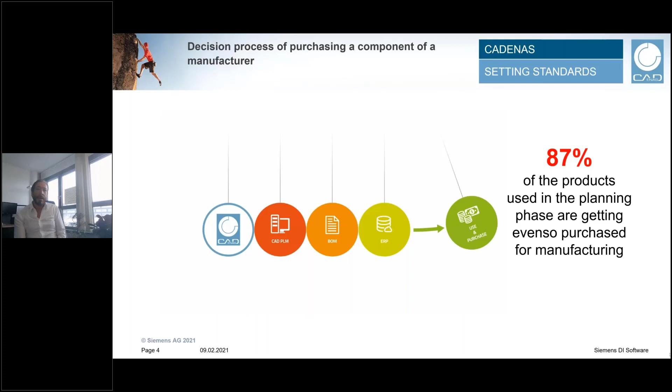So to understand how I can make the engineer happy, we go on to the next slide, and we will see the evolution of CAD data over the last decades. In the 90s, you just made an engineer happy by delivering him a 2D DXF or DWG format. Sometimes you could also make him happy by delivering a PDF. So that was in the 90s.

If you go to the early millennium, engineering already started to be 3D. There you had to deliver a neutral format called STEP or IGES. But also in the first decade of the millennium, it moved. So every engineer is requesting today 3D native formats based in NX or Solid Edge or SolidWorks or Creo.

But if you're looking to the 2020s, you see that with 3D native you make him a little bit happy, but today you need a 4D model. A 4D model is a 3D native model plus behavior plus additional information. What we understand by a 4D model, I can show you on the next slide with a small video.

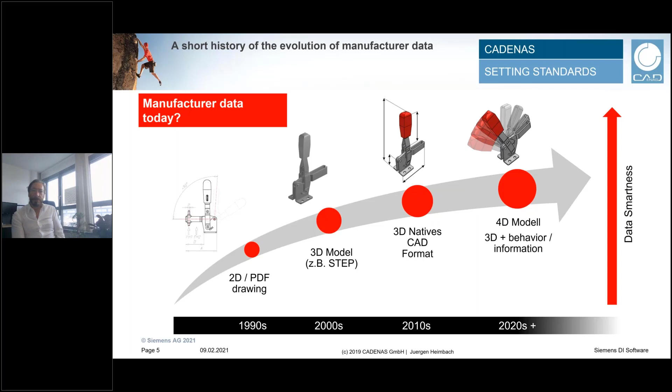Jürgen, here's the first question, I guess, from an electrical manufacturer. His question is, with his electrical components, there is no behavior. So what should he do? I think we will see it also on the next slide in the video. Of course, electrical components also have behavior.

But a normal 3D model of an electronic or electrotechnical component cannot control a mechanical component. What they need, of course, is the behavior, like a PLC, and they have to give information to the mechanical components. For example, with a sensor, if you want to grip anything, the sensor has to tell the gripper that the part is now at the right location and now you have to grip the part. That is done by electronic components.

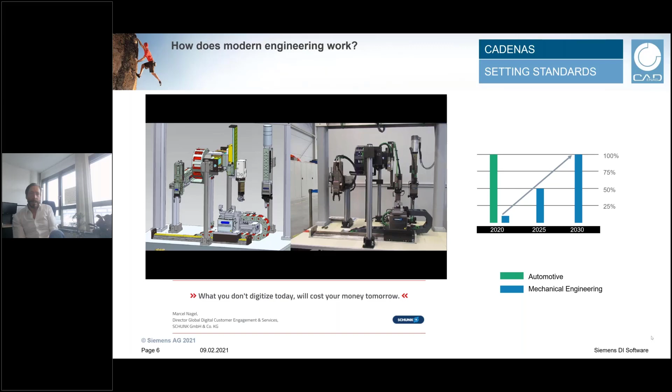For this, of course, we have the experts from Siemens on board, and Bernd will show you on the next slide how Siemens, together with Cadenas, is solving these requirements of the engineering of the future. Yes, exactly. Bernd, I think you mentioned that perfectly. Thanks, Wolfgang, for switching over.

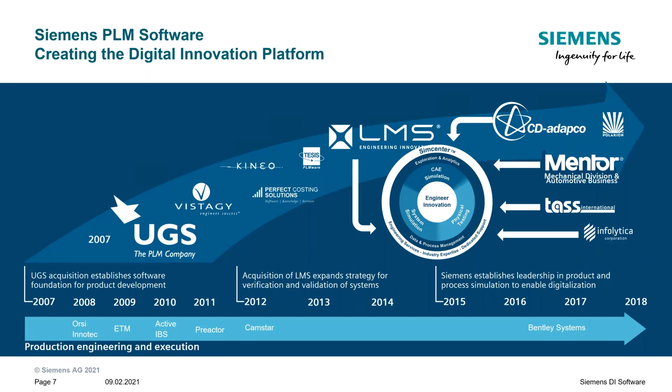That's great already. Let's first start with a short introduction of who Siemens Digital Industries Software is. Our story starts basically in 2007 when Siemens acquired UGS. Stepwise, Siemens increased their software business by purchasing Vistagy, acquiring Kineo and so on. Stepwise, functionalities came into our system, and we developed over the last decade with a lot of different companies.

One special portfolio we acquired is Mentor, and with this portfolio we got the possibility to do electrical design, harnessing, and connections. Starting from the basic CAD systems, we developed into a company which can offer a lot more than just CAD: simulation, FEM simulations, electrical engineering tools, and so on. Good.

Please switch over to the next one, Wolfgang.

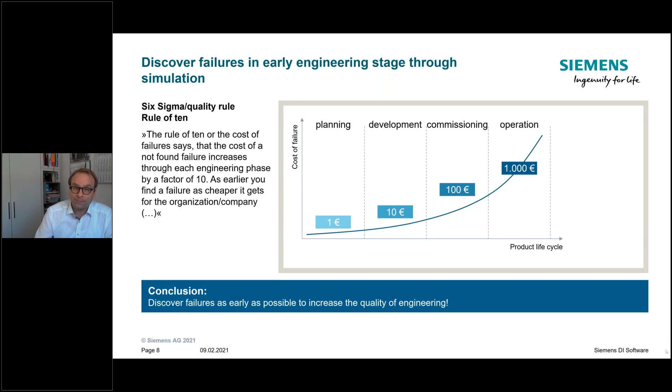Good. Please switch over to the next one, Wolfgang.

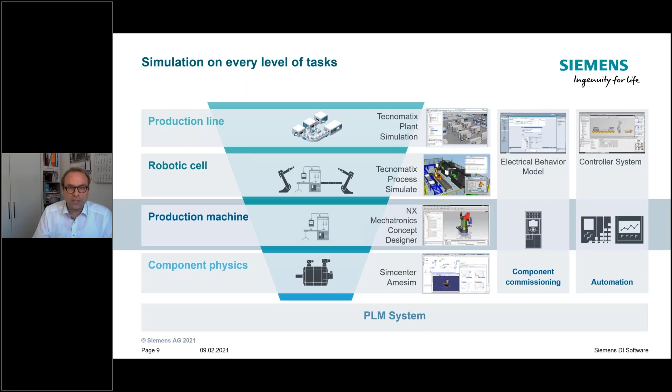Good. Thank you, Bernd. You have to add something, Bernd? No, that's fine. I just wanted to start over with the next slide. So I'm right excited to present, as you know. Oh, my time is over now, and Victor starts over, right?

Yes, that's true. Thank you, Bernd, for introducing the different levels of simulation, as well as, of course, talking about the behavior models. And it's great to hear some real examples, going a little bit deeper into details. Thanks for that, Victor. Exactly. So this will be my task, showing you a couple of examples and maybe some deeper insight into this mechatronic design approach that we are following.

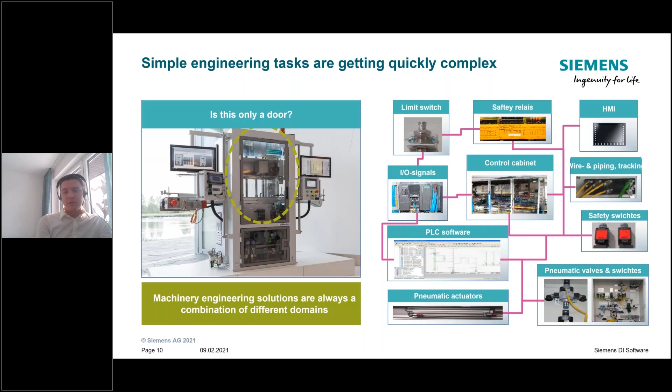And if we take that into consideration, we detect that in the early phases when we design a machine, we need to involve mechanical, electrical, automation departments, maybe even fluidic departments if we have some pneumatic or hydraulic applications as well. So the tasks are getting quite complex and interconnected, as we would call it. And if we look at the data, going into the next slide, please, we can see that we have very much information that is spread throughout these processes.

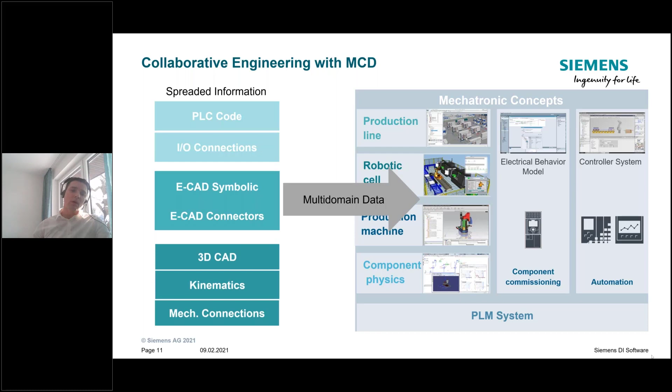So as we saw earlier, we have these different levels of simulation, for example, production lines or production machine level, or even the level of a component in detail in the component physics. We also have electrical behavior that's relevant for us. We have the control system, etc., and everything needs to be somehow interconnected and provided by component suppliers as well nowadays. So let's take an example of the data that can be provided through the systems. Going to the next slide, here we took a deeper look into the kinematic definition of an object.

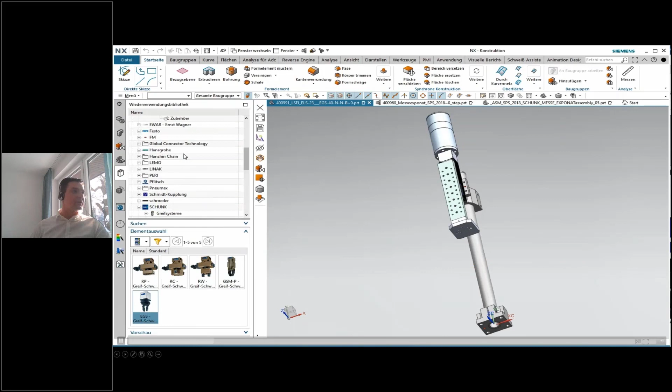So in this video, let's see if it plays. I hope it plays for you guys. For me, it's a little bit not as fluid, I would say, but I have it as a backup here as well. I hope in the recording it's responding a bit better.

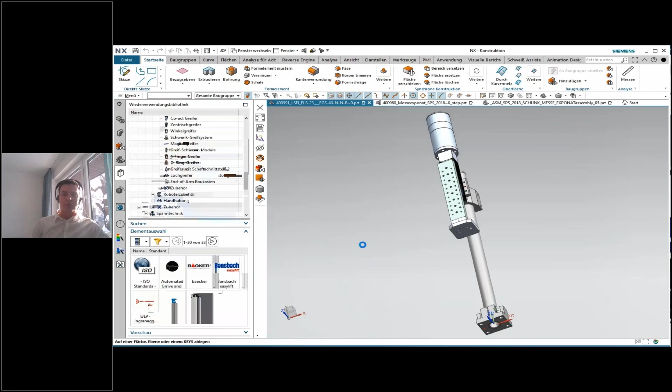So here, for example, our task is to have a gripper installed into our machine. And as we can see here, we are in the NX design environment, and we can browse through the Cadenas library in this case, and of course select our gripper. In this case, it's a simple Schunk gripper. And here we place the object directly in this dialog. We can, of course, define the parameters and configure our component, similar to how I would do it in Cadenas PARTsolutions, for example. But here it's completely integrated in NX.

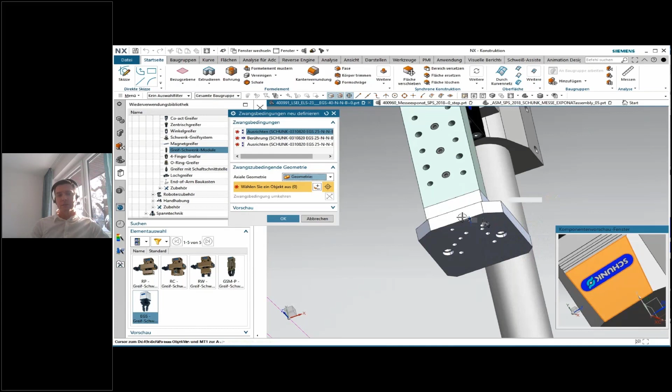I can use the default NX functionality here to place my component on the right position. So have some assembly constraints defined directly for this component. This is, I would say, some default functionality that there is.

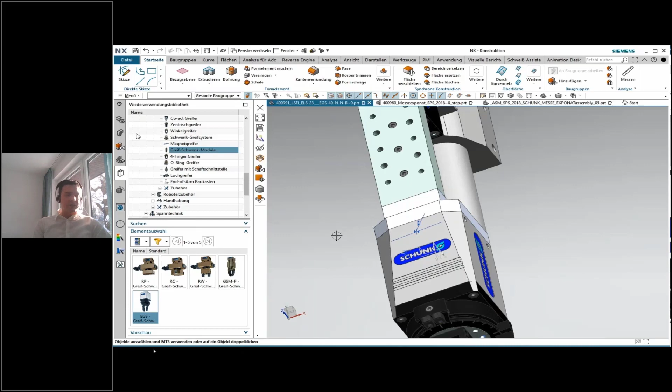But the interesting part about this component that we just added is it's actually multiphysics. So it includes some kind of behavior in addition to its 3D representation. So in this case, when we switch to Mechatronics Concept Designer, we will see that we have the physics already defined. So the gripper in this case has the functionality that it has 2 axes that grip the components. And this is something that is provided directly in the component via Cadenas.

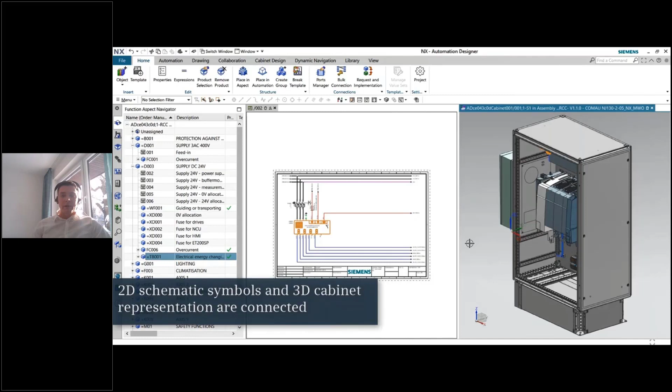Going to the next video, this is another example from the multidiscipline of engineering. So here the task is to define the electrical and cabinet design for a component or for a machine. And here we are also in NX, but in this scenario, we are in the automation and electrical design department. And here the task is to add components to the electrical cabinet as well as to the electrical schematics.

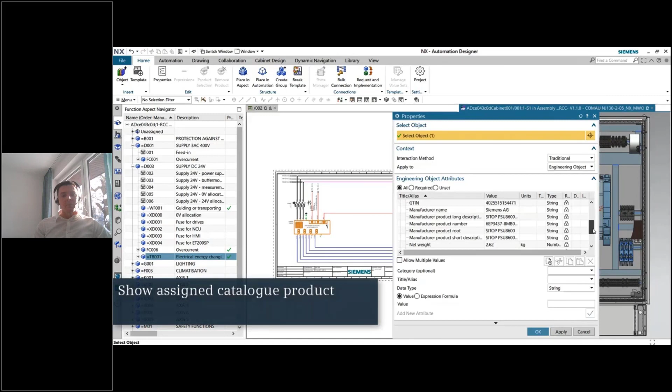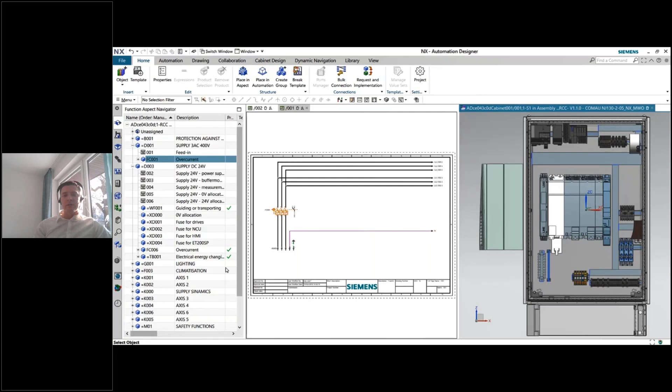And on the left side, we see the function aspect navigator. This is more like the electrical structure of the machine. And we can switch to the feed-in area here. And we can see, okay, here we need a new component. We might already have a schematics for the component, but we are not having the specific component selected yet. This is a common workflow for electrical design, to have a placeholder at the beginning and then specify the component further in a later stage.

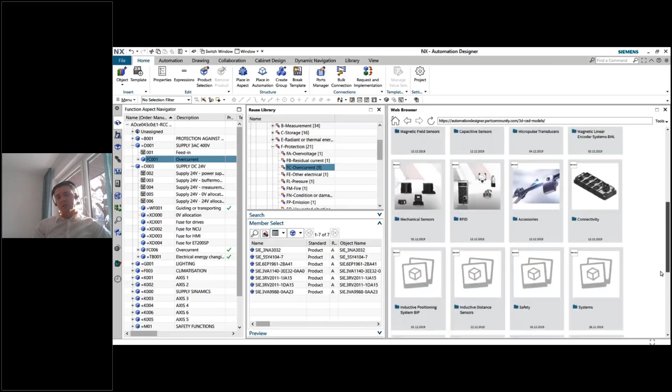And here we can also use the web browser, for example, and directly browse to the PARTcommunity. In this case, we are more interested in the combination of 3D data as well as the electrical design data, because we want to have electrical information added to the components as well. In this case, we need a circuit breaker and some solution for overcurrent.

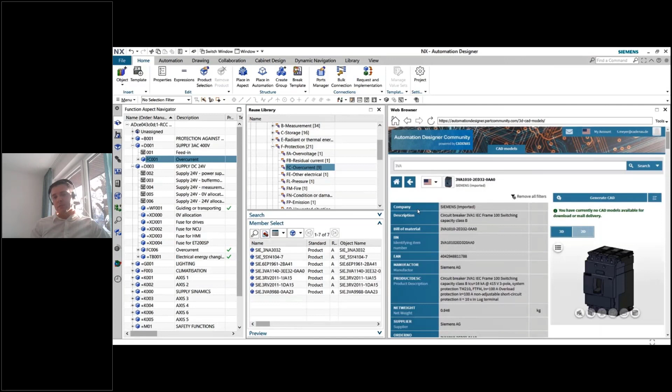So we go to the Siemens area and select a power connector. Here we see directly, of course, the 3D preview, as we are already using in 3D CAD design. But here we are more focused in this task on the combination of CAD and electrical design. So we select a component that fits our electrical needs. As you can see here, of course, we have our parameterization for the component, and also the electrical parameters.

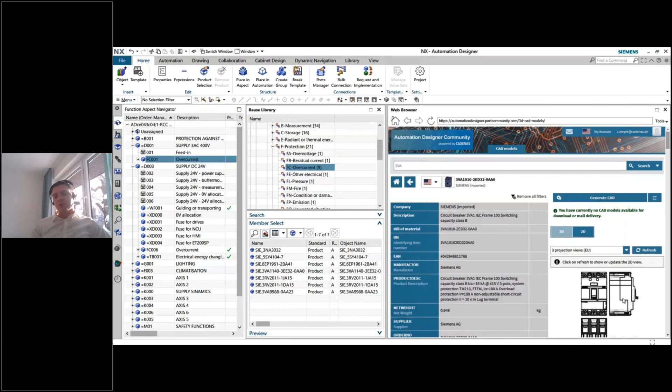I can see I have the 3D design on the right side. Switching to the 2D design, we have, of course, the layout of the components as well. But the important part here is when we generate this component in the next clicks, we actually generate not only the mechanical representation of it, but also the electrical. And for the electrical representation, we need classifications, for example, via eCl@ss, and this is provided with a component.

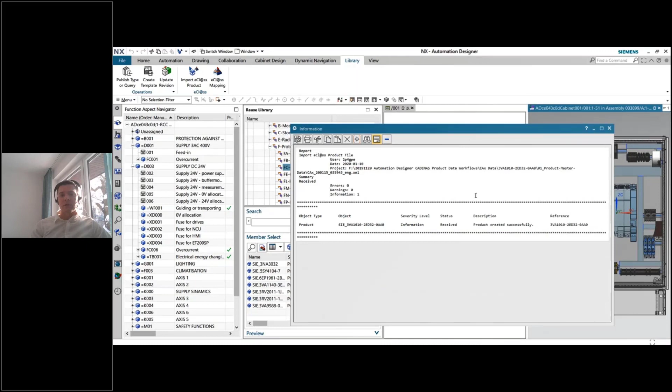So here I can add this component to my customer library that I'm using currently, and it's automatically specified and classified via electrical parameterization. So here on the NX reuse library, I can just refresh my part, and we can see, okay, the component is added. And this is the electrical and mechanical representation. This is the most important part here.

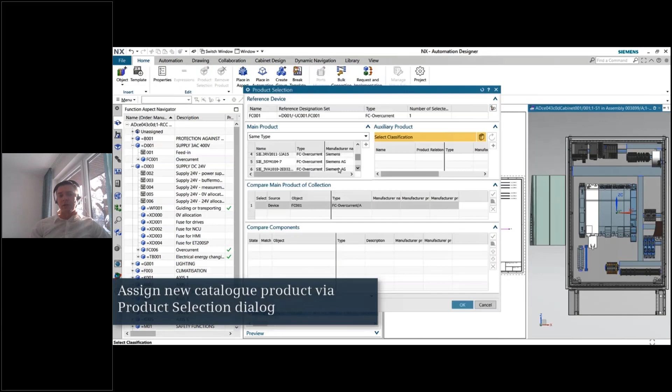So for my electrical structure, I can now select this component here, add it to my electrical design, and here I just can drag and drop the component to my electrical design as well as to my schematic design, and place it, of course, in my cabinet in this case.

So these two small examples we wanted to show you. The first one was the 3D data included with the mechanical, kinematic information, as well as the behavior from the gripper, for example. And the second example was the 3D data included with the electrical design, which is, of course, also included in the multi-domain data that we want to provide to our customers.

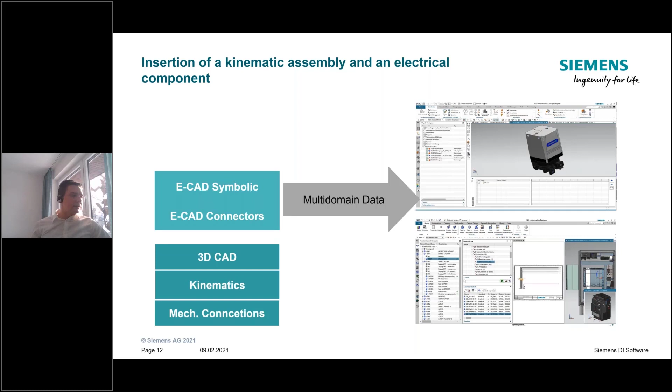Going to the next slide, we can see it in a different view. So we have, of course, our different libraries, and the important part is that we need this multi-domain data here. So depending on what level you are working on, you might need some information about the component that includes, for example, simulation data for virtual commissioning, or electrical data for cabinet design or schematics design, but also, of course, 3D data, maybe even the kinematics just for internal simulation of the timings of the machines, etc.

So this is something we want to provide, and we are working with Cadenas together to have different integrations and, of course, different possibilities for our customers to work with these multi-domain tools.

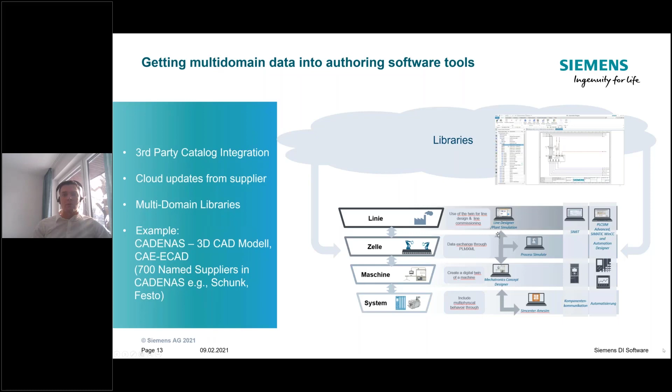So, and as a small example for Siemens components, if you go to the next slide, Bernd, did you want to talk about the different Siemens components that we offer here? I can do. Thank you for that, Victor.

And I really like these nice examples you brought over because it really shows that our NX platform is not only a CAD platform anymore, it's really a platform for mechatronic engineering, so that I can do the mechanical design, I can do mechatronic engineering by placing the kinematics for sensors and actors, and I can even do the electrical engineering. So basically all I need for mechanical engineers or for machine builders, I would say. Yeah, and even mechanical and electrical engineers so far.

Good. One point on the libraries we have together with CADENAS. Right now there are roughly 50,000 Siemens products already in this library and accessible for our customers. You can download them through PARTcommunity, or you can get your CADENAS app and download them there. And great, Wolfgang, that you switch over to the library here, so we can have a short glance. Maybe you can talk a little bit on that, Wolfgang.

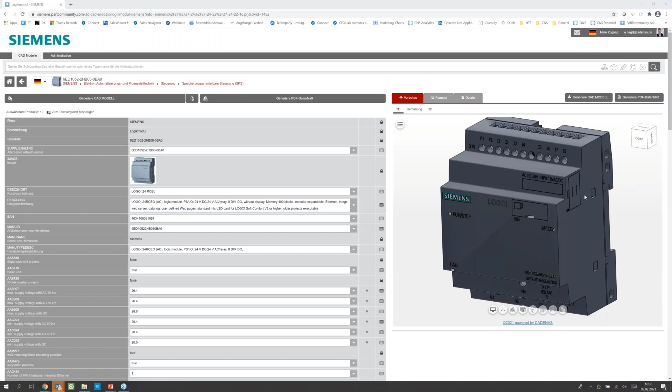Yeah, no problem. This is the public PARTcommunity catalog of Siemens, and we are now on a single product here. But as you can see, at the highest level, you will have very different... We'll switch here to English. So you also see the catalog is available in multiple languages, and you can click through this digital catalog and find the component you are looking for. You can of course also search by order number or by the name of the product. Then you can find your part.

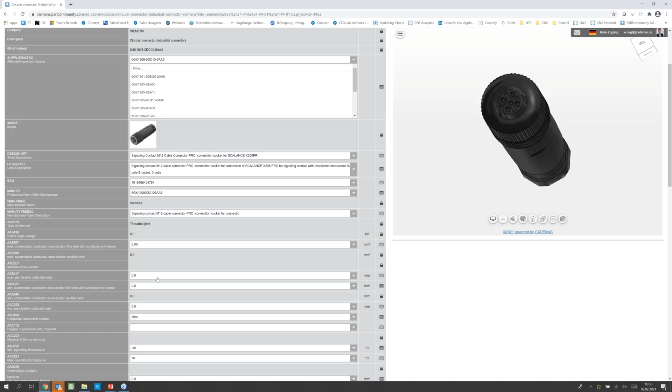You have an overview of all the attributes. You have different kinds of filters here, so you can filter by names, by attributes. For example, if you're looking for a certain diameter or certain other data. So you can really find the right product, and then you can download it in the format you are looking for, not only a CAD format; now you really need a format with all the metadata also.

Right. This catalog is freely accessible as far as I know. Is that right? Yeah, it's freely available for the users. So the users are in the best position here. They get the best planning data for €0.

That's great to hear. So sorry, this question has been pre-discussed, Wolfgang. So sorry for just asking this one.

Good. In general, I would say there are over 700 manufacturers already in your catalog. Is that right, Wolfgang? Yeah, correct. Growing and growing. Of course, we have to be honest, there is a big imbalance. Many of those catalogs are not sufficient at the moment. We have seen that there are new requirements, and many of them have to get better to really fit these new requirements. But in general, we have over 700 manufacturer catalogs.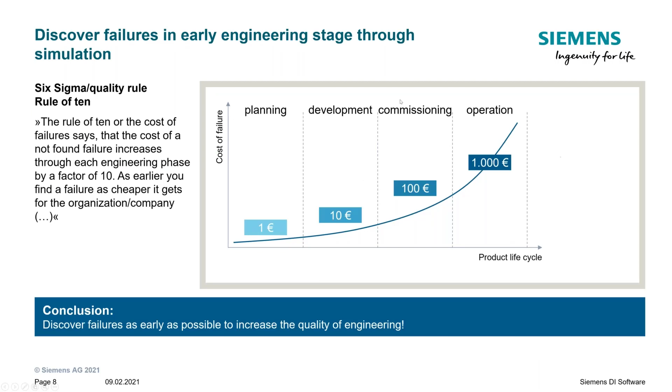All right, great. So maybe you take over, Wolfgang, and go to the next slides. Yeah, thank you, Bernd and Victor. Really very impressive what is going on in the planning market. And now the big question is, summarizing the last slides, we talked about the new planning behavior. We saw how Siemens software can support this new planning behavior, and which advantages this new kind of planning has, especially talking about costs.

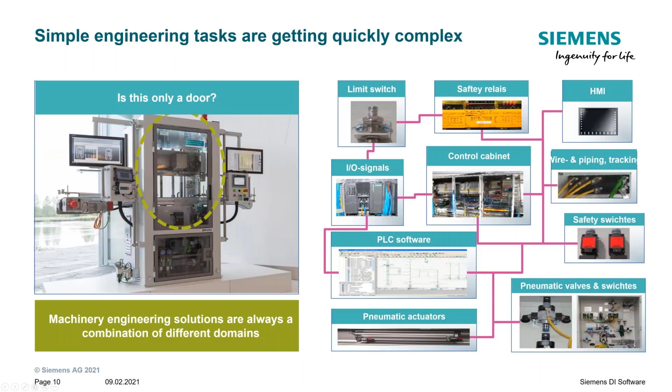And this new planning behavior has been sped up by COVID. Many people say COVID is a pause button, but in reality, COVID is a fast forward button. So all this planning behavior that before COVID was maybe 2 or 3 years away is now the very present. And what does this mean for you as a manufacturer of components? It means that you need to offer data that is really attractive to your engineer.

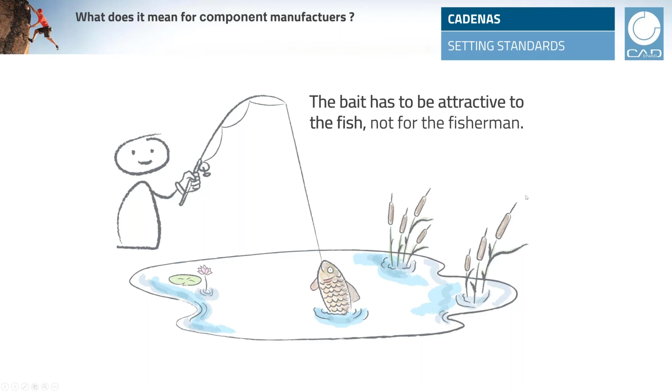And maybe you know this quote from Germany. It says, the bait has to be attractive to the fish and not the fisherman. If you are a fisherman, then you know that the bait is not very tasty. This is exactly the same with planning data. Before this digital transformation and this new planning behavior, it was sufficient just to deliver mechanical formats; maybe it was even sufficient to deliver STEP data.

But now we really have many more formats, much more data that is required. Talking about simulation, especially today, or electrical behavior. If you are also in the architecture market, there are many formats. And this is what you need to deliver to the market. If you don't do that, I always say this is like you are an ice cream shop and you just offer one flavor. Maybe just yogurt ice cream.

I personally don't like yogurt ice. And if somebody enters the shop who likes to have strawberry or lemon and you don't offer it, we can all expect whether he is going to come back. And now we have a comparison.

If you deliver STEP data, we also call this STEP data a digital zombie. And on the right side, we have the digital twin, and the digital twin is the aim, because the digital twin has the power to really satisfy all the needs on the market. And if you just deliver STEP data and maybe some data sheets, you see here the effort of 80 minutes. Your customer has to do it on his own.

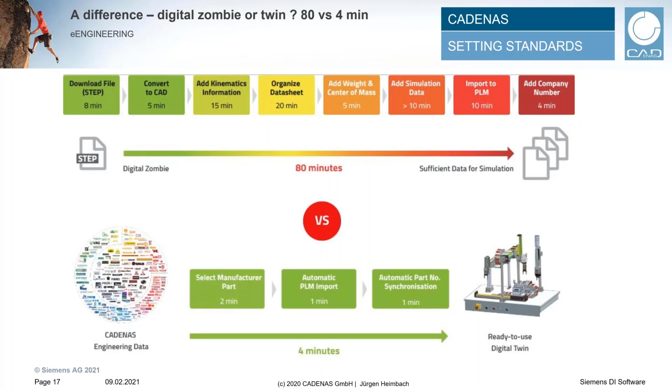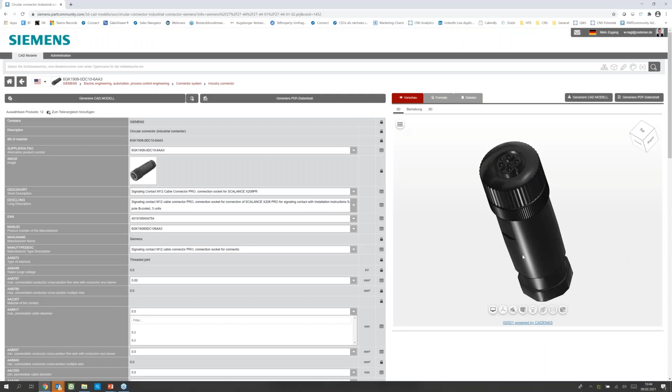We also have a question from Dan Mills-Bell. He asked, if you now deliver all that digital twin data to the market, is there any possibility to protect your manufacturing data? Thank you, a very good and very often asked question. Of course, we don't deliver any manufacturing data here. These are reduced levels of detail. The technical data is very precise, because all the simulation and calculation going on has to be very precise. But the geometry is really a reduced level of detail, so there is no way they can really copy your part.

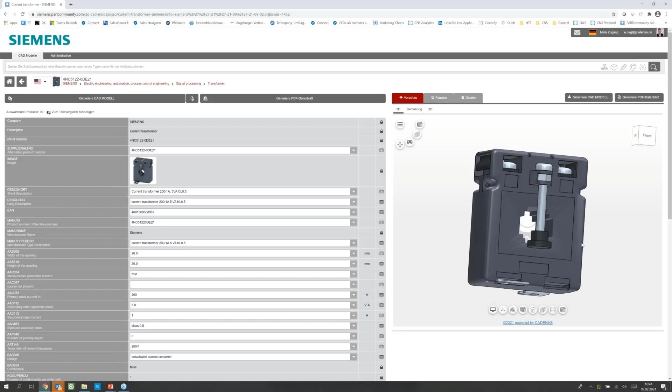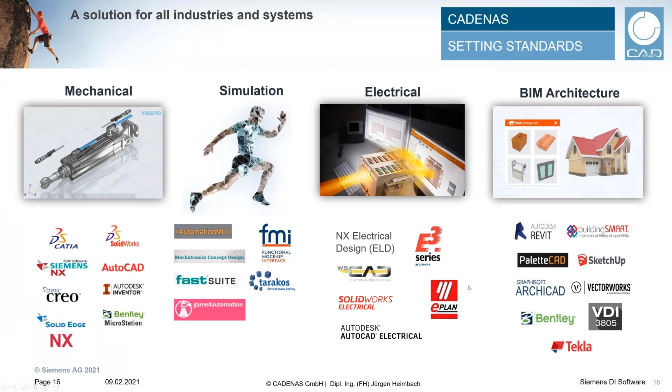And let me also add something. You can also protect the behavior of the data. There are systems like the Functional Mock-up Interface or Functional Mock-up Unit. There, like you know from software and DLLs, you can hide your knowledge inside a DLL. So all your behavior is also protected. Thank you for adding this, Jürgen. It's very important, especially nowadays, if you offer data to the market, that it's really protected.

And now, as I said, COVID really changed the market completely. We also see this with social distancing. What doctors say is high risk is going into nightclubs and indoor parties. But also very high risk is visiting fairs and trade shows or customer visits. This is why it is forbidden at the moment. And the question you have to ask yourself is how will you now reach out to your customers? How can you make good interaction and in the end sell your products?

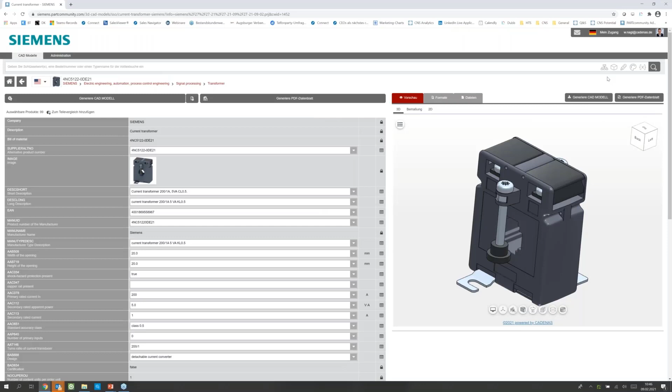And this is very well possible with digital tools or visibility in the NX library or in the Cadenas library that are available in public. And the great thing is, if any engineer downloads this component, you will get a notification of who downloaded it, and you can now contact him.

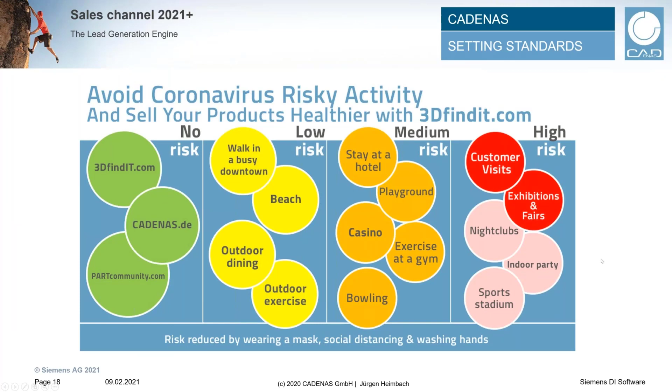And what's very interesting, on the next slide, we see here the statistics on the downloads over the last year. And of course, COVID also influenced our rising downloads. But what happened after the first lockdown is very interesting, that we really had a maximum speed-up in the downloads. And as you see here, with 80 million downloads per month, digital planning is more and more the daily business.

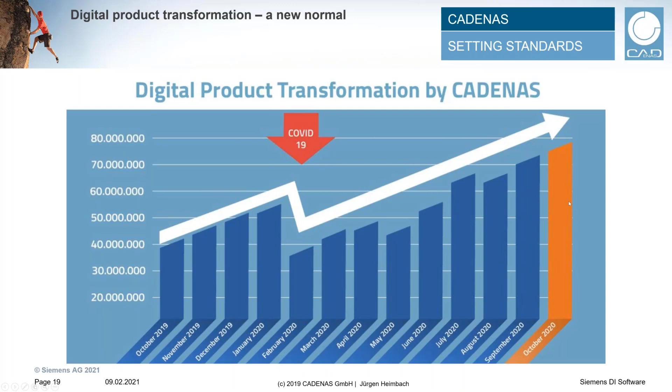So all the data sheets and all the print catalogs are still good things. It's always the combination of online and offline tools, but we see here very directly that the engineers go into more digital planning, and this is something you can use. Many of our customers used it to increase their revenue, their downloads, or even decrease their efforts in creating data, decrease the time their customers have to wait for an offer. For example, in this case, from 2 days to 5 minutes.

And in a digital market, first of all, it's a competition of data quality, and then it's always a competition of who is the fastest. How fast can you deliver? Just think about yourself. If you order something at Amazon and you don't get a notification that the order is done within 5 minutes, then you get kind of nervous. And this B2C attitude we all have now in us also happens on the market. So if your customer does not get his offer or his product immediately, he gets kind of nervous because he is so much influenced by Amazon and all the other stuff.

So in the end, we want to support you to get into this process, to get started. And this is why Siemens and us, we created a nice package for you. So we will help you, no matter if you are a mechanical engineering company or a component manufacturer. You get completely for free an individual workshop with Siemens and Cadenas. If you are a component manufacturer, we will model a digital twin with all the behavior information and all the geometry information. And maybe Bernd, you can explain what Siemens is offering here.

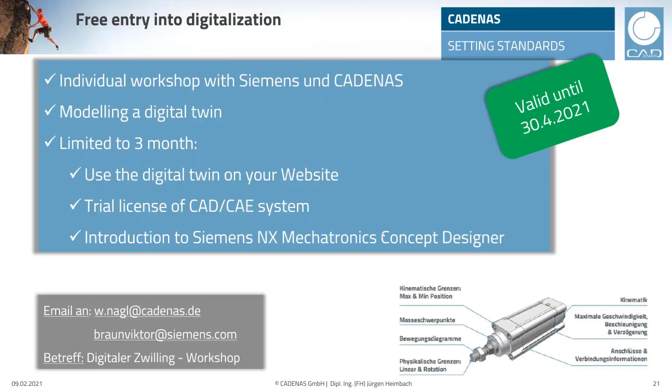So Wolfgang, a common question is, for example, can I get, additionally to this webinar, some videos that I can show my management how it works? So I think we can of course share the videos Victor showed, so that you can show your management what 4D engineering is, what the future of engineering is. Yeah, we will share the slides and also the links to the videos.

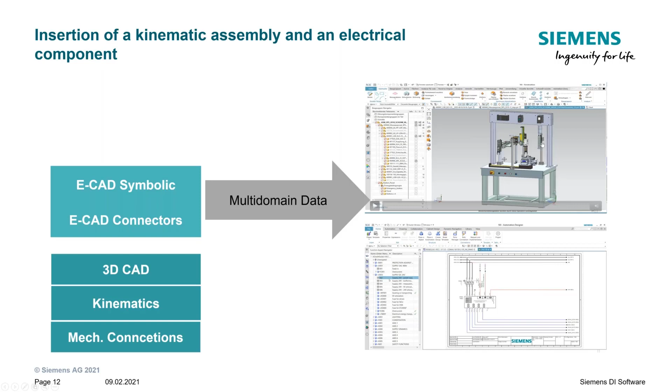So we know from experience that it's often the case that you would like to try it, but you need to convince your boss in your department. So we will give you good data to introduce it to your department. And this is also why we created this offer. There is nothing to lose. We can really customize it to your needs.

Jürgen, Wolfgang, maybe one of you can answer that. Actually, what percentage today is coming from the library within engineering? Can you say that? Sorry for interrupting you. So that's a good question. We have some customers who are using the digital twin data, and I have some examples I can later add to these slides so that everybody can see.

We analyzed already that we have customers who are using 85% standard parts of manufacturer components for their engineering. And I think that's a very important impact also for COVID. Why should I engineer everything myself? Why do I have to invent the wheel again and again, if, for example, companies like Schunk or Festo or Zimmer are already delivering these kinds of products? So for me, it's faster engineering and more accurate engineering.

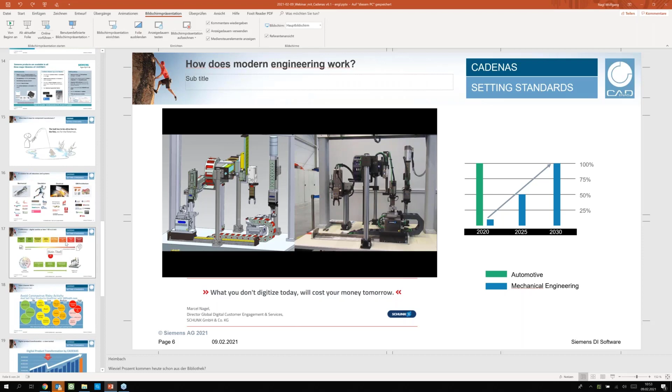Okay, great. So here is another question: how much effort is it really now to create digital twin data or step data to digital twin data? And yeah, we can really start small here. Start with your top selling products, or maybe start with the products that you don't sell at the moment and boost your sales with these formats.

And yeah, the question always is, what is the price if you don't do it? Because the lost opportunity costs, if you really just hand them over, not the ice cream, just the milk and the flavor, do it on your own. We know, and Bernd also said, the engineering departments are very, very busy and they don't get paid to do the work you should do as a component manufacturer. So we also offer good packages now during COVID times that everybody can start somewhere.

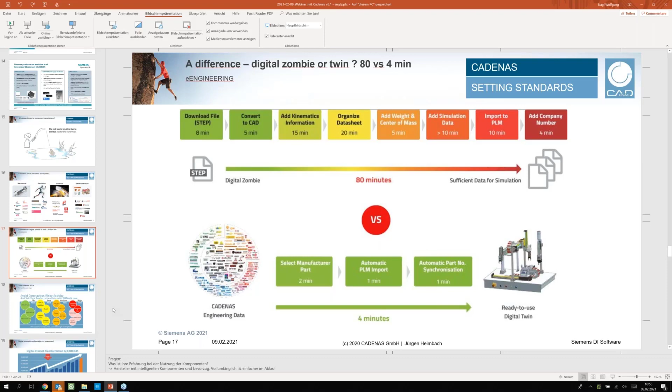Yeah, and Wolfgang, let me add to your metaphor about the ice cream. So if you have the right ice cream machine, the effort is not too high to make a good ice cream.

Now I want to have ice cream. Okay, but yeah, COVID. We don't wanna talk about COVID. No, I think everybody's fed up with it.

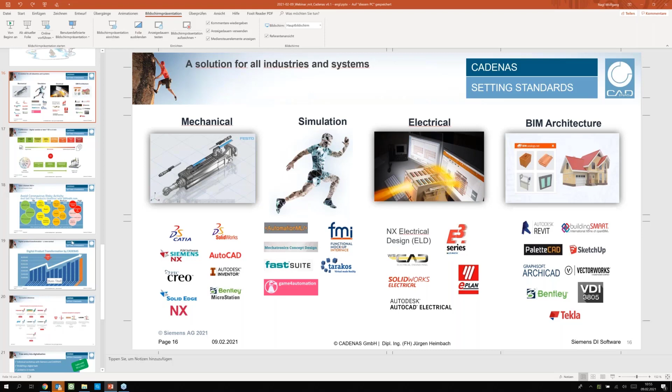But the great thing is you can use it. You can get a winner out of this situation, because in any time of crisis you can really win great market shares, but you can also lose great market shares. This is only possible in a crisis situation. In a non-crisis situation, the market is very settled, but in a crisis situation, you can really win great market shares.

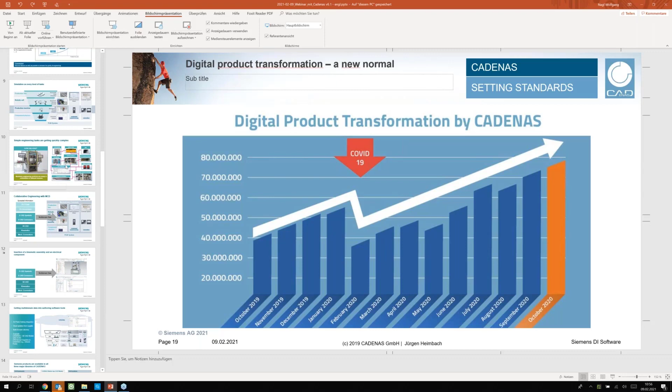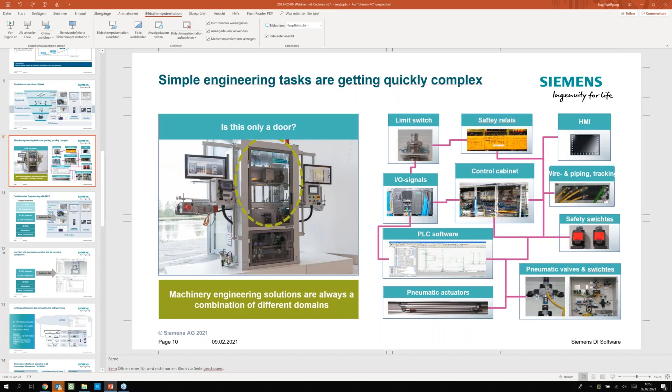Maybe a small addition from our side at Siemens as well here. We are experiencing the exact same behavior with COVID. For example, we were distributing virtual commissioning implementations and software that provides virtual commissioning capabilities, so that you can postpone your commissioning phase, or at least do your commissioning phase in the office or even in the home office, which was not possible before.

Here with COVID, we experienced a lot of demand for exactly this application, so that we are able to do virtual commissioning earlier, maybe in the design phases, as Bernd showed with the slide on the rule of 10, for example. So virtual commissioning is one example where we see this shift into the early phase, and of course in a safer environment like home offices. And for that, we need to provide behavior models maybe, and kinematic information, etc. So this is also a catalyst for that.

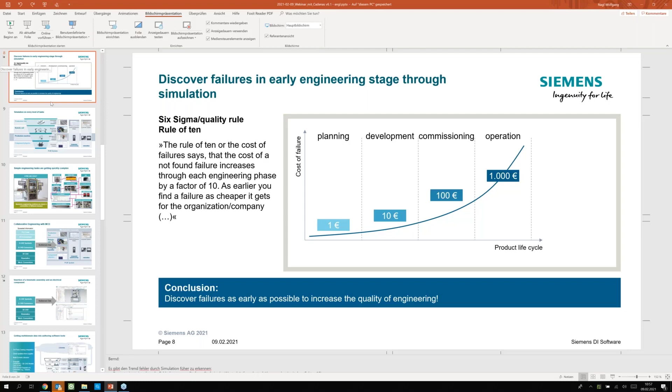Okay, then I have a question here. Maybe a mechanical engineer asks: he does not have any Siemens software yet. He has other software, so can he also use this package now to start?

Yes, I think there was a similar question before, but to elaborate on that, of course, we can start small. For example, if you're using a different CAD system other than NX, you can still use Mechatronics Concept Designer, and Mechatronics Concept Designer enables you to hand over data from other CAD systems and, for example, do virtual commissioning in this environment. So yeah, it's possible. Okay, great.